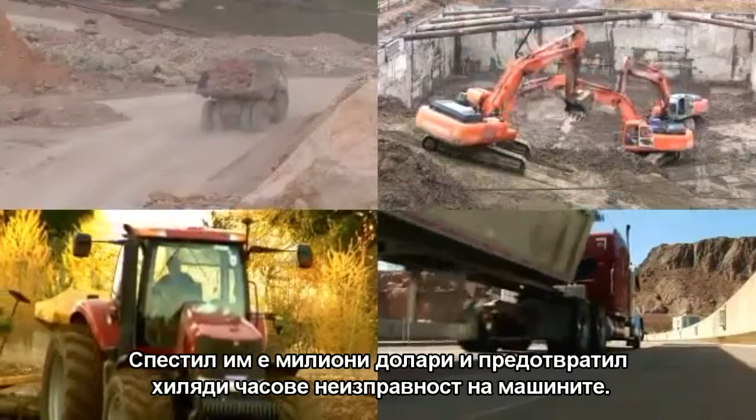It's been used around the world by large industrial companies for about 2 decades, saving them millions of dollars and preventing hours and hours of downtime. Let's explore what it does by showing you some examples of how large industry has been benefiting from this product, and then we'll show you how it's able to do it and how you can personally benefit from it.

Xtreme Fuel Treatment has 4 main benefits and several smaller benefits. The first main benefit is that it dramatically increases the life of your engine and the length of time you can go between services and repairs.

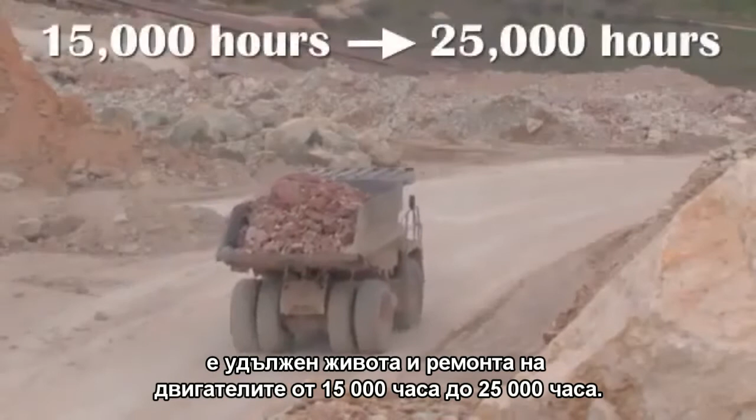XFT is used by the largest mining company in the world and has been for years. After they started using this product in their huge dump trucks, they were able to extend the operating hours between engine repairs from 15,000 to 25,000 hours, continually saving the company millions of dollars. There are documentation and test results available.

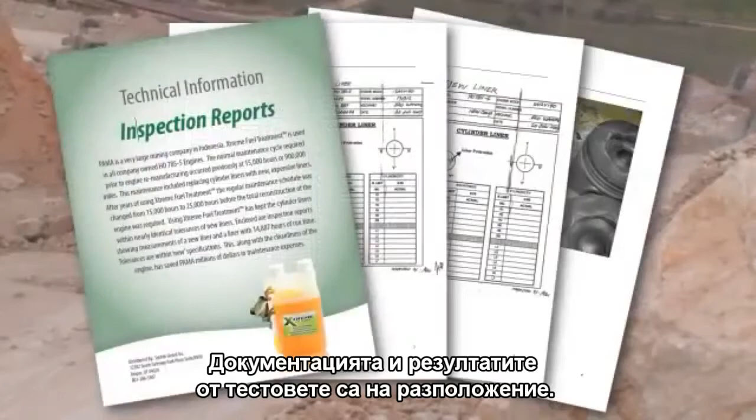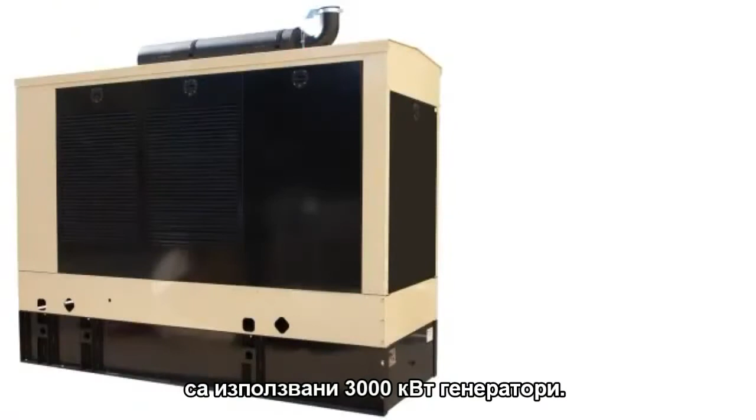The second main benefit is that it increases fuel economy. In 2002, during the pre-Olympic events in Salt Lake City, one location had some 3,000 kilowatt generators. These stationary generators were using 875 gallons of diesel fuel per day. After using Xtreme Fuel Treatment for just 1 week, their fuel consumption went down to 650 gallons of fuel per day. This was a savings of 225 gallons of fuel each day.

Documentation is available. Main benefit number 3 is that it increases horsepower and improves performance. Many trucks are finding it easier to carry their loads up steep grades. One trucking company using the product not only went from an average of 5.0 to 5.7 miles per gallon in their trucks, a 14% improvement, but they were able to top some very prominent hills on Interstate 15 with 1 more gear than before. Again, documentation is available.

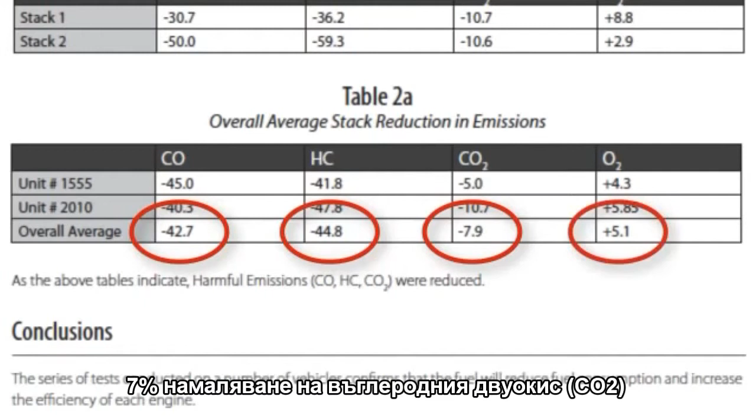Sound a little too incredible? Everything about Xtreme Fuel Treatment is documented and tested. It is absolutely the most effective product available, not only for diesel, but also for gasoline, which is why Syntek Global is bringing this product from the industrial marketplace to your fuel tank. There are other benefits of XFT that we haven't even talked about yet. Those are best shown by explaining why XFT works so well.

Here's how it works. XFT has several components that all work together to bring you these amazing benefits. Let's quickly break them down. A very prominent component in XFT is a unique organometallic burn rate modifier.

This works to lower the ignition point of the fuel by several hundred degrees. That's important because it causes the fuel to start burning sooner and provides a more complete, longer, and better burn in your engine. If your fuel waits for that high temperature to fire and it burns too hot or too fast, it ends up leaving a good portion of the fuel unburned and wasted on emissions.

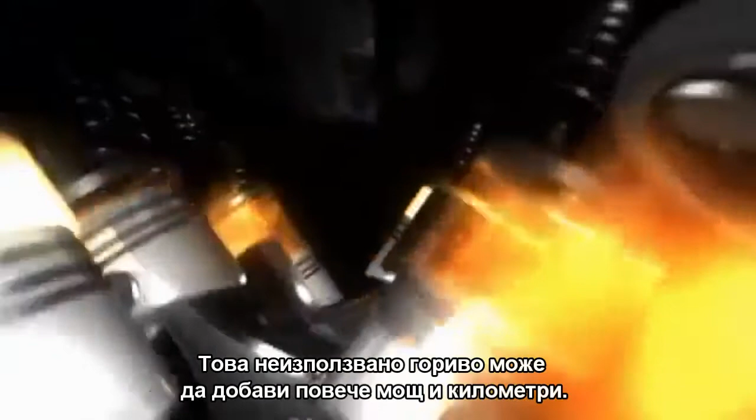That unused fuel could have provided more power and better mileage. XFT lowers the ignition point, utilizing much more of the injected fuel, allowing for full performance, and dramatically reduces the emissions that come out. XFT also contains a lubricating agent, which provides lubrication for pistons, fuel pumps, and injectors, reducing friction, which can be your engine's worst enemy.

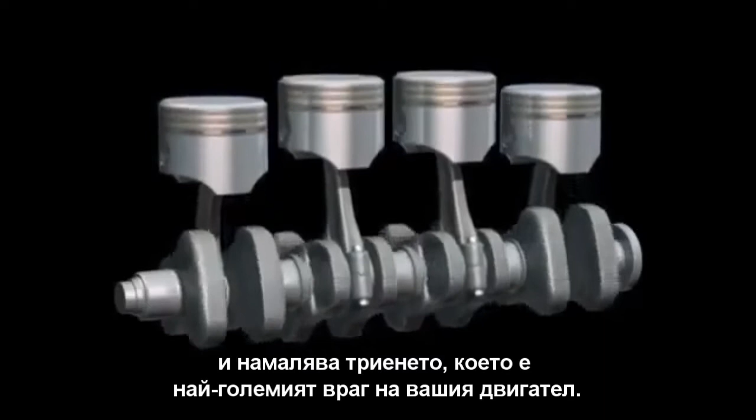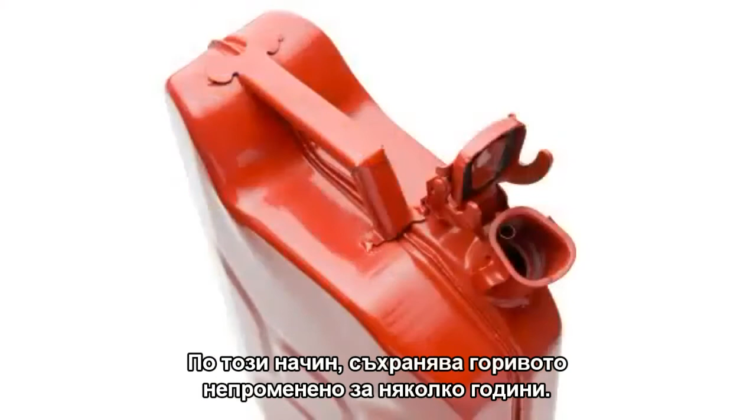There's also a fuel stabilizer. Once fuel is made, just like any oil-based product, it has a tendency to begin to break down. As it breaks down, it loses some of its efficiencies. XFT stabilizes the fuel, keeping this breakdown from happening for much longer periods of time, giving your stored fuel a significantly longer shelf life, even for years longer. This is especially important for storage containers, generators, boats, and other seasonal equipment that may hold fuel for an extended period of time.

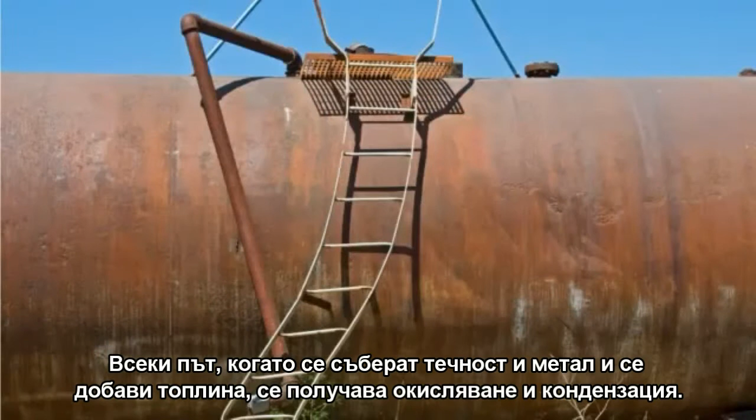Now, anytime you put liquids and metals together, add oxidation, heat, and condensation, you are bound to get rust and corrosion. This is exactly what happens in your fuel tanks. However, XFT contains rust and corrosion inhibitors to minimize corrosion in fuel tanks and delivery systems. Just look at the difference between these engine valves with treated fuel and without.

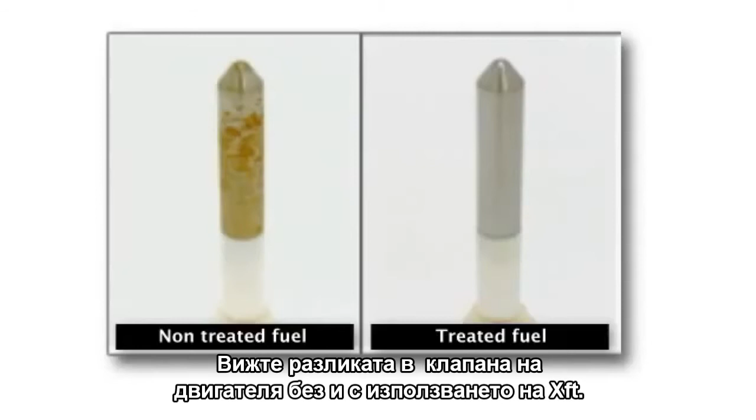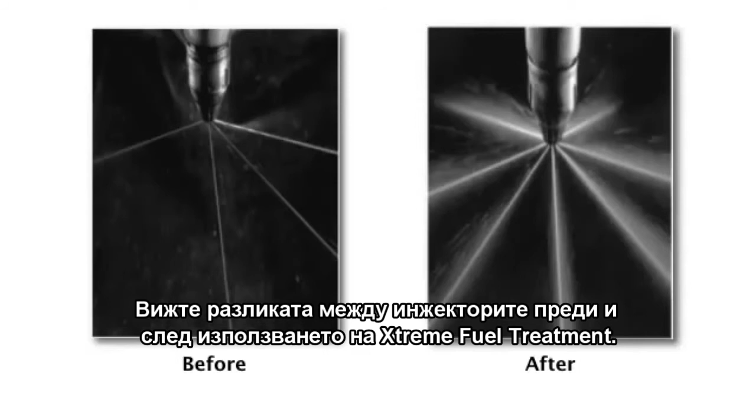As you may know, modern high-tech engines function very precisely, and there's little to no room for even a tiny particle of dust or dirt without impacting performance. XFT contains detergents that keep your engine clean and remove harmful deposits from fuel pumps and injectors, keeping your engine running at peak performance. See the difference with this fuel injector before and after Xtreme Fuel Treatment.

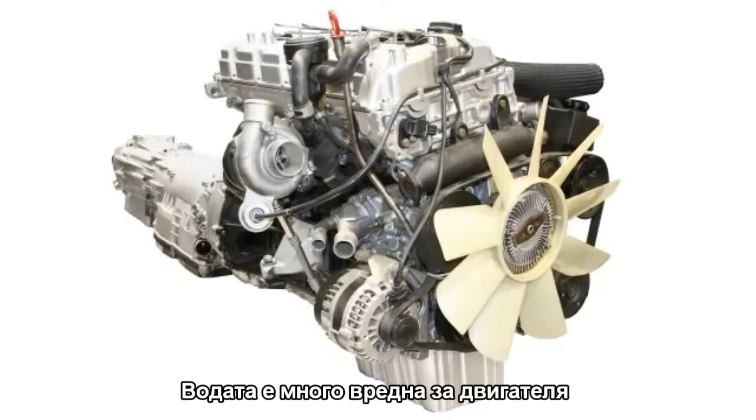Another problem that plagues engines is sludge buildup, which inhibits performance and clogs filters. XFT contains a polymerization retardant and dispersants to help prevent and reverse sludge buildup in your fuel. This is especially important in diesel fuels.

Xtreme Fuel Treatment is powerful and effective, but at the same time, it is also perfectly safe for all your engines. It has never had a negative effect on any engine, and we are perfectly confident that it never will. XFT is patented and registered with the EPA, and just to give you one more reason to try it, Syntek Global offers a satisfaction guarantee. Put it to the test.